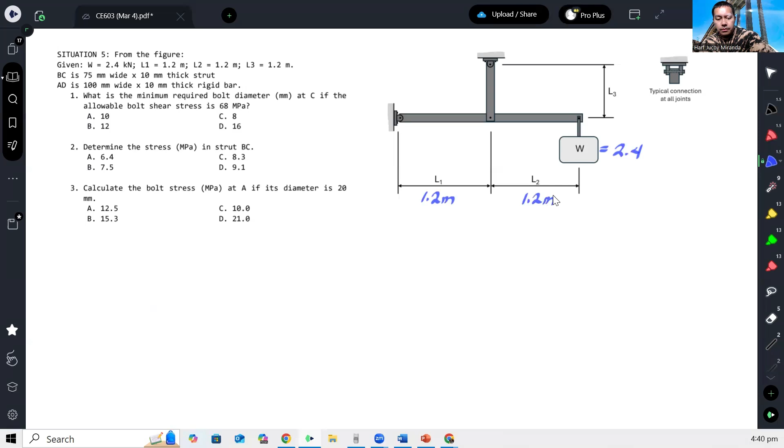Okay, then the member BC, actually something is missing. It should be A, B, C, then D.

So member BC is a 75 by 10 millimeter thick strut. Then AD is a 100 millimeter wide, 10 millimeter thick rigid bar. So what is the required bolt diameter at C if the allowable bolt shear stress is 68 megapascal?

Then determine the stress in strut BC. And for number 3, calculate the bolt stress at A if its diameter is 20 millimeters.

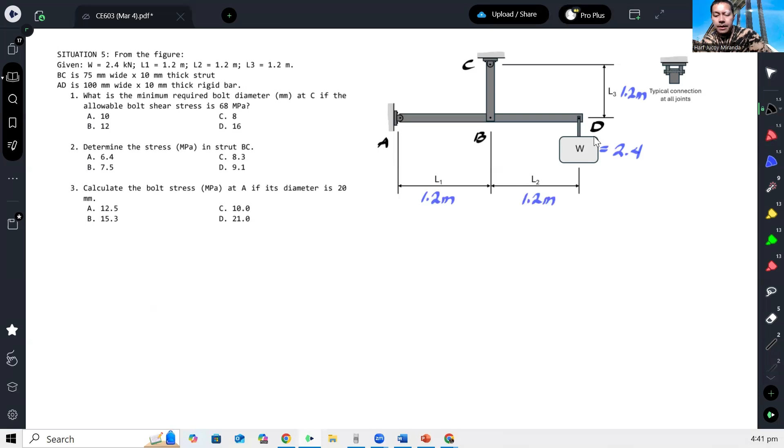Okay, let's answer. So when we draw the free body diagram of member ABD or AD, we are expecting a load here.

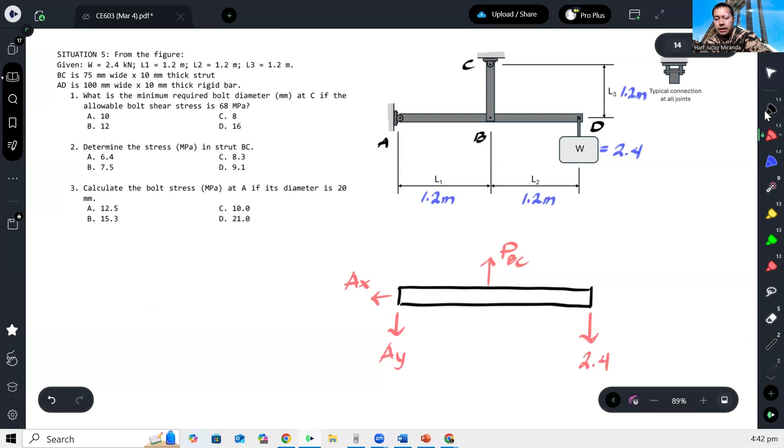Okay, so now looking at it, this is 1.2, 1.2. So to solve for the force in BC, we will just take the FBD of AD.

So from the FBD of AD, we can take summation of moment at A equal to 0 so that we can solve for PBC. So PBC times 1.2 is equal to 2.4 times 2.4. Therefore, PBC is equal to 4.8 kilonewtons.

Okay, so what is being asked is, what is the minimum required bolt diameter at C?

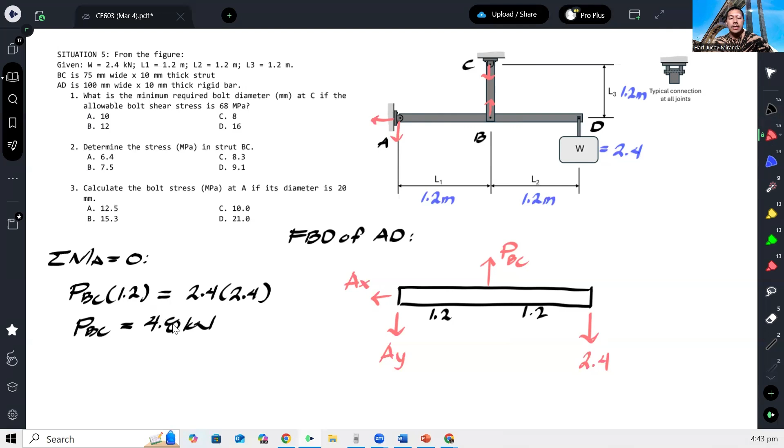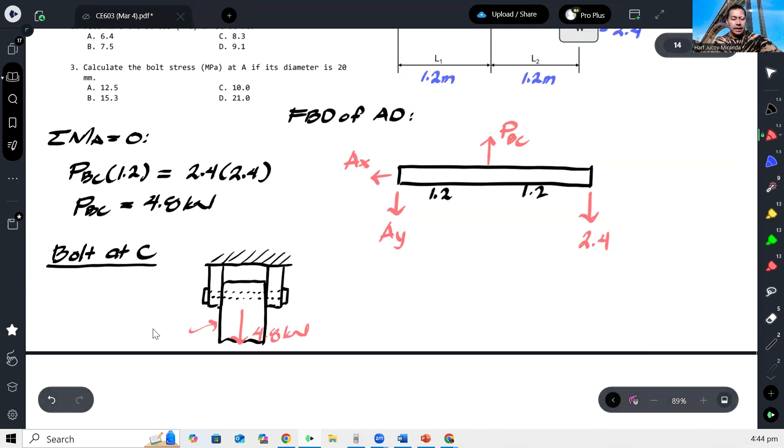So the bolt at C, the connection looks like this. This is the member BC. Here's the bolt. Then there's a force acting here. The force acting here is the 4.8 kilonewton, because this is our BC. So the force that this bolt needs to resist is 4.8 kilonewton.

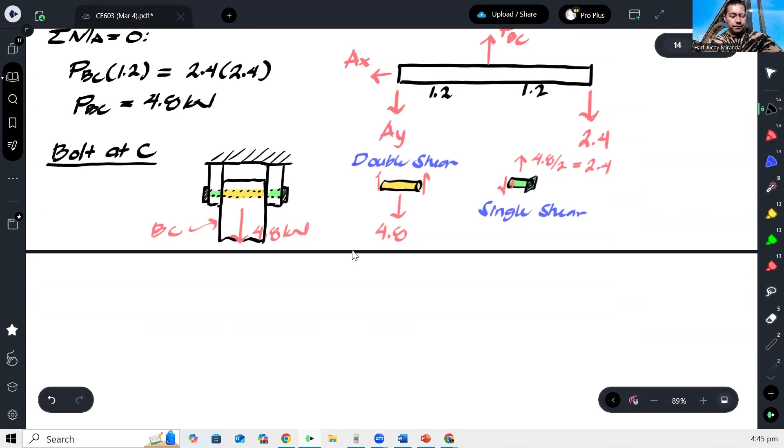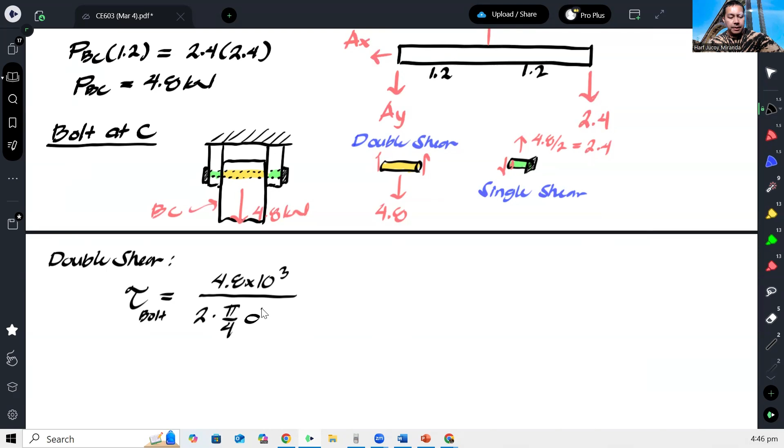So for double shear, our shear stress for the bolt is equal to force over area. Our area is times 2 because it's double shear, so pi over 4 times diameter of the bolt squared. This should not exceed the allowable stress of 68.

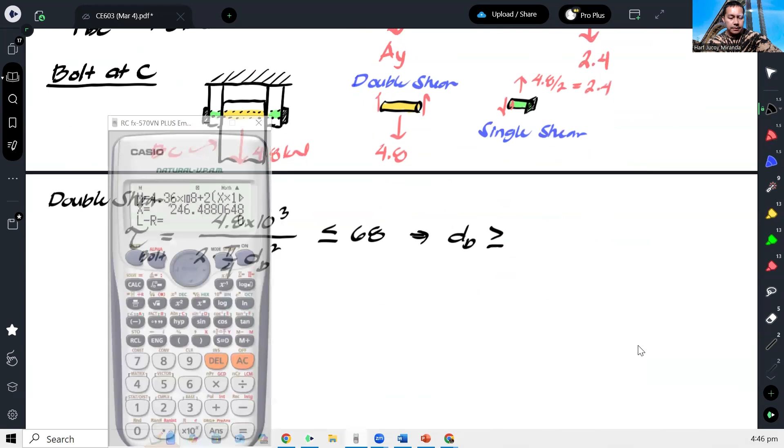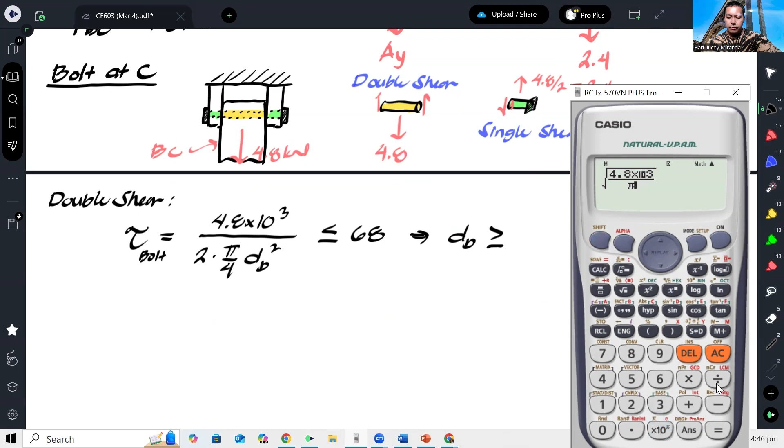And from here, we would be able to calculate that the diameter of the bolt should be at least 6.7 millimeters.

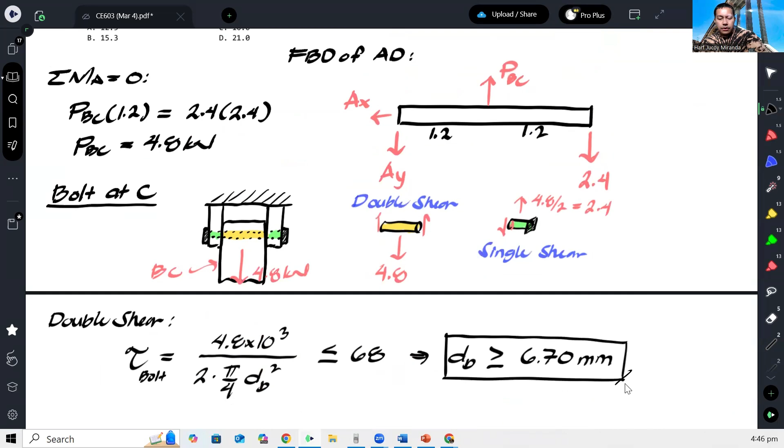Okay, so in the choices, we will choose, of course, the next higher value, which is letter C.

All right, next. What would be the stress in strut BC? So we need to calculate what is the stress in strut BC. To calculate that, we just need to figure out what we can solve for in strut BC.

Since we already have the 4.8 kilonewton force in BC, the force at BC is 4.8 kilonewton. And given the dimension of BC, 75 by 10, so it's coming out. This is BC for number 2.

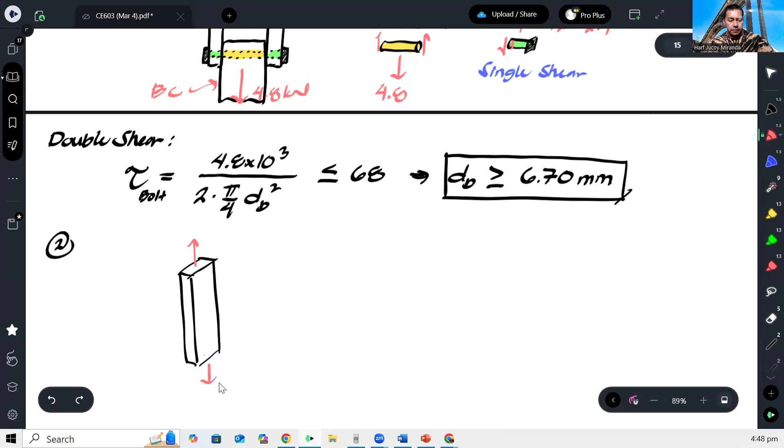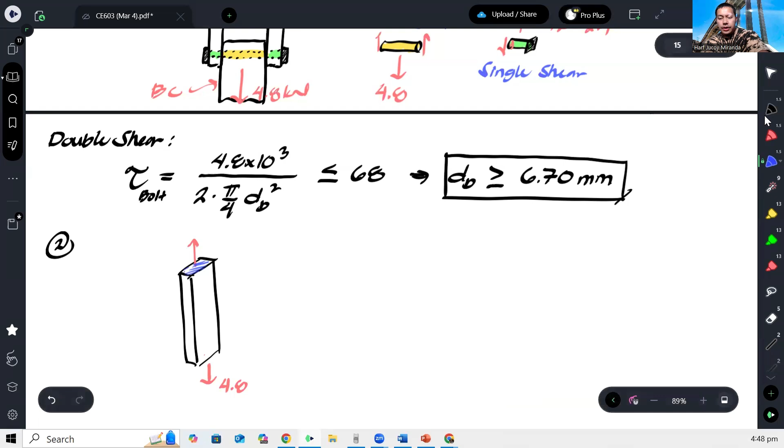There's a force here, which is 4.8 kilonewton. So the contact area here is this one, with the dimension 75 by 10. So this is 4.8.

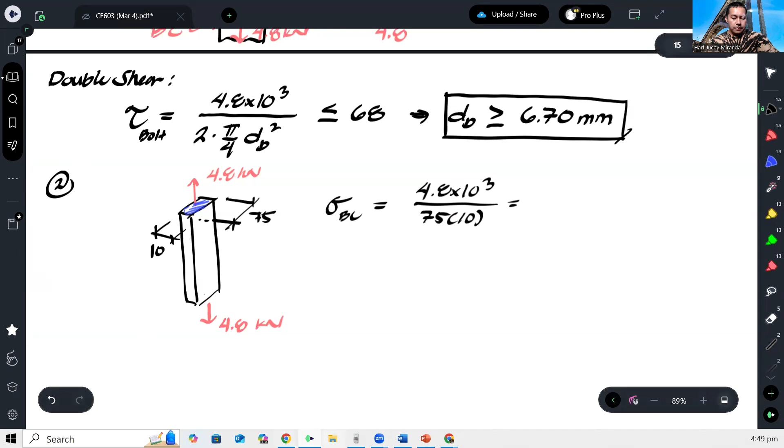So the stress at BC will be force over area, which gives us 6.4 megapascals.

And for number 2, the answer is letter A.

Number 3, calculate the bolt stress at A if its diameter is 20. What is the bolt stress at A here?

So for A, we need to find the reactions AY and AX. We need to get the total reaction at that bolt, which is this reaction, the resultant of AY and AX.

But when we do summation of forces in X, we just get AX is equal to 0. Then summation of forces in Y, since we already have PBC as 4.8, AY turns out to be 2.4 kilonewtons. So the reaction at A is also 2.4 kilonewton since there's no X component.

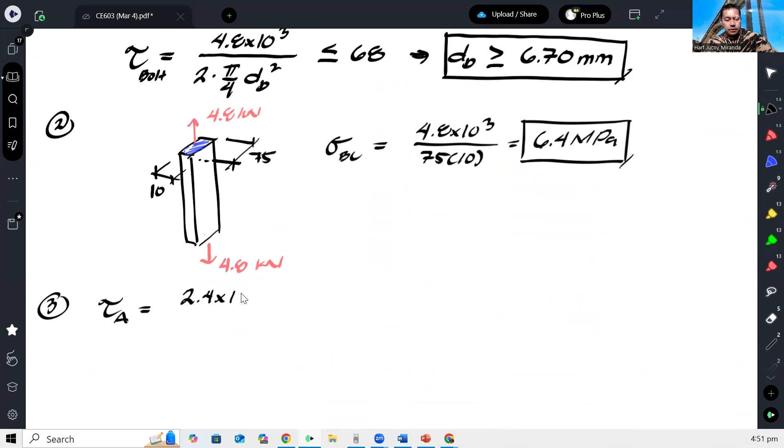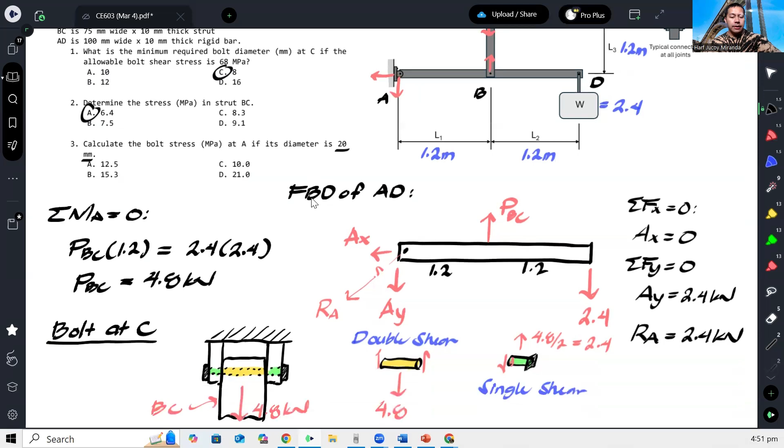So for number 3, the shear stress for bolt at A would be force over area. The area for number 3, since the diameter is 20, is pi over 4 times 20 squared.

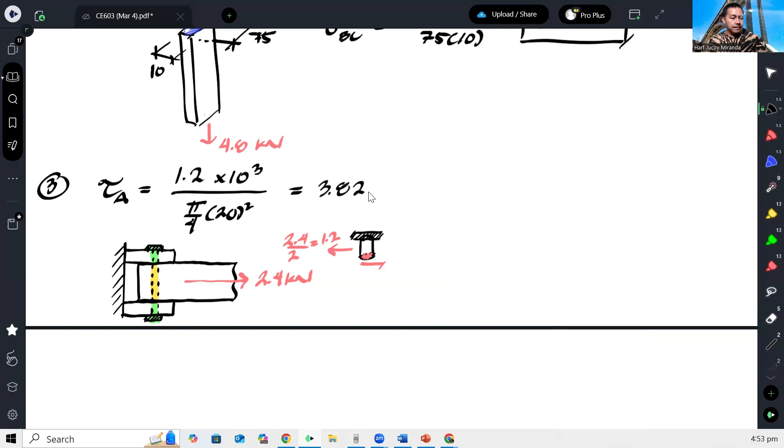So the answer should be 3.82 megapascals. So this should be the correct answer.

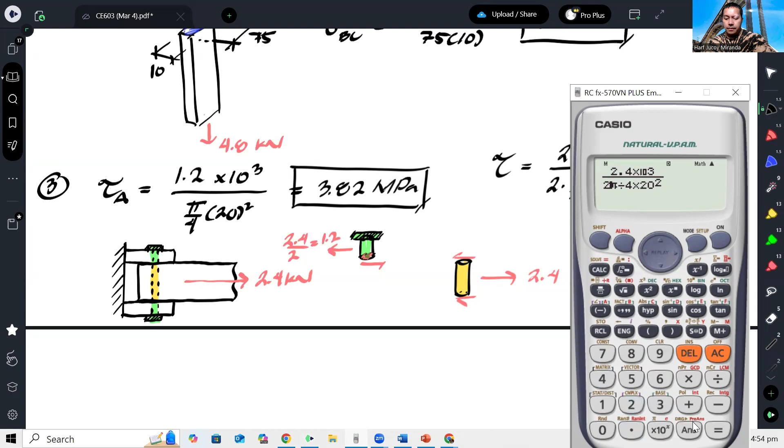Because it's double shear, the computation now is force 2.4 over area, and your area is doubled. You should get the same answer - 3.82. The answer here should really be 3.82.

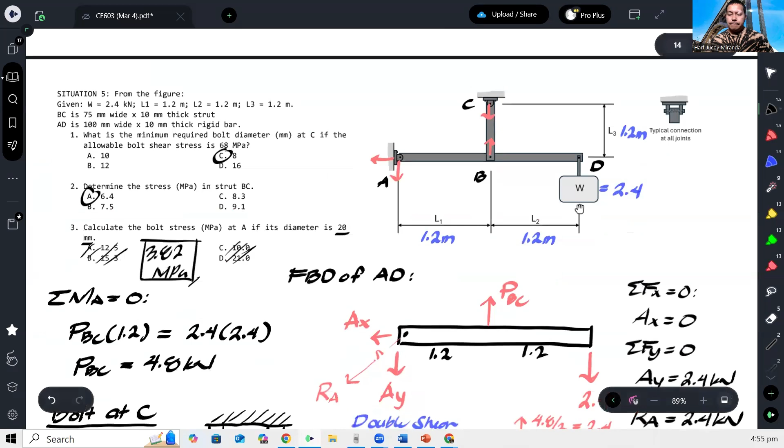So the correct answer here should be 3.82. All right, and that's how we would solve this problem.